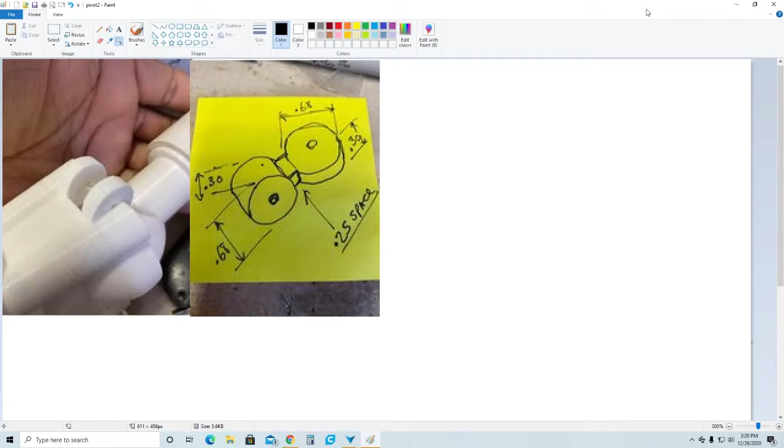Our part is 0.68, half of that is 0.34. And our part is going to be 0.3 thick. And this is what we are asking the computer to do.

I will do a small hole in the middle. So I'm going to copy, Control C, Control V, and I'm going to make that hole 0.125.

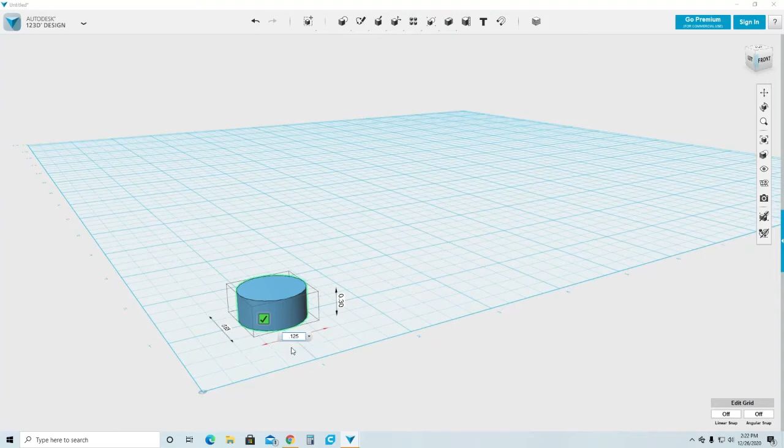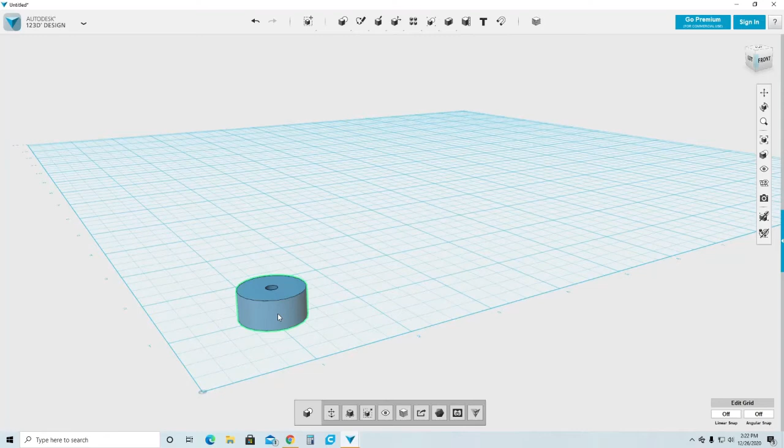I'm going to remove the center. I'm going to copy this part that I have done, Control C, Control V. I'm going to separate it from here, 0.25.

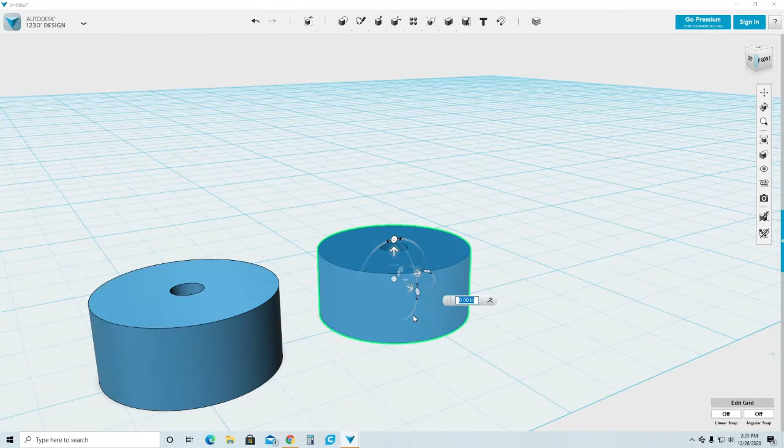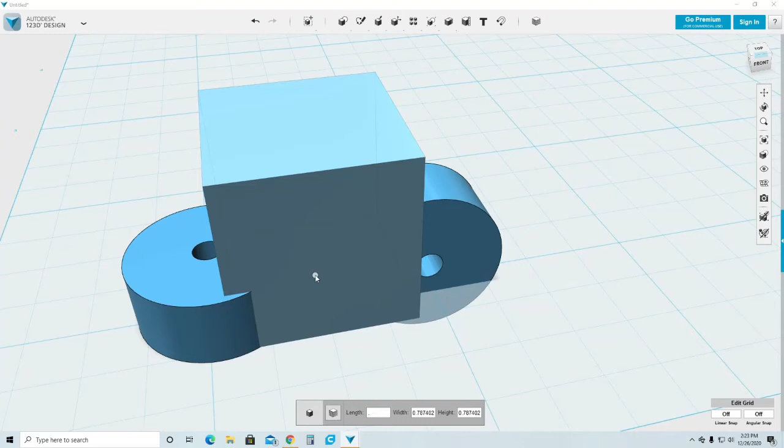And I'm going to rotate the part 90 degrees. I'm going to join those two pieces by a square. For now, let's make it 0.3 by 0.3 by 0.3.

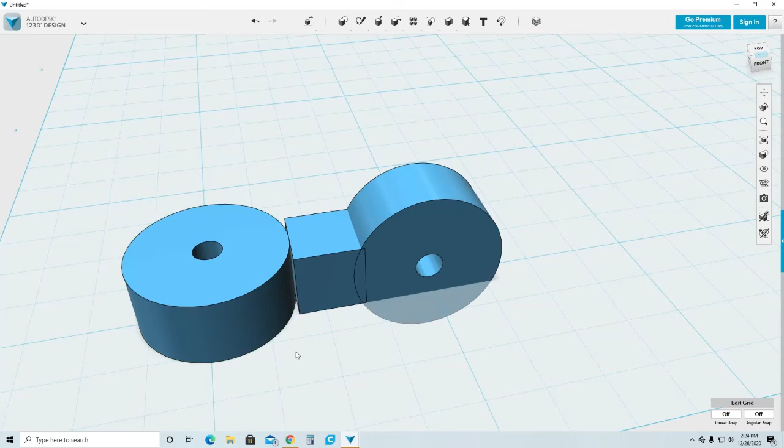I can see that I cover this part completely nicely, but not here. So I'm going to select this and move the face there. I'm going to join all the parts. And there we go.

Sometimes you will see this separation on parts. That is due because the position where I placed this was not perfectly aligned with this. If you need to fix this, you don't have to, but if you are particular and you like to make sure that all your parts are exact, all you have to do is try to move it and click on the surface, and that will remove it.

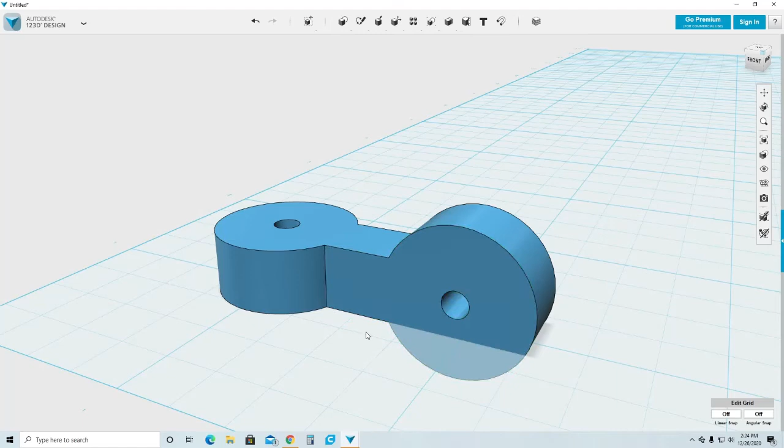You have to go to the other side because they're not the same. Move it, and there you go.

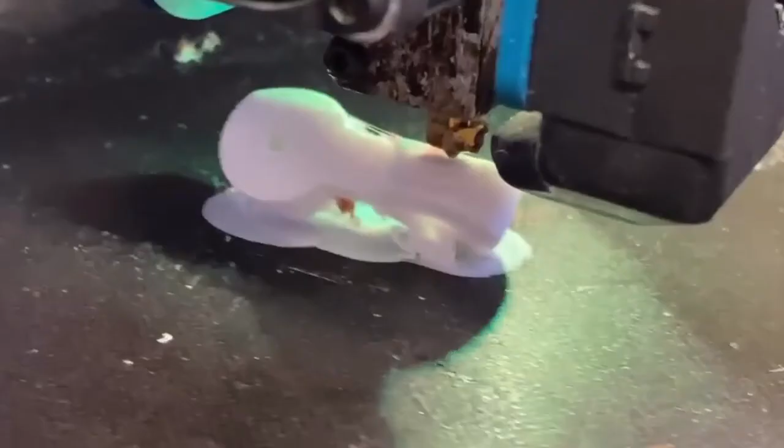All right, let's try to print this part and see how it works. Here's the part. As you can see, it can rotate in both directions. The part is a little rough, as I said, because it's PLA.